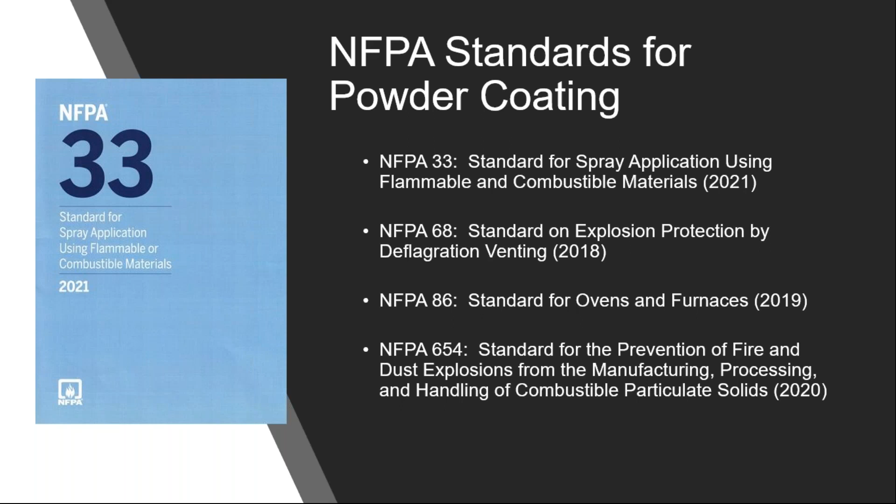If you look at NFPA 654, there's a section that says you need to do a dust hazard analysis of your facility. A lot of people think, gee, if I use powder coatings, I have to do this dust hazard analysis at my powder booth, and so on. But if you actually read 654, it says NFPA 33 is the standard that governs the processes around the powder booth. If the powder gets out beyond the coating operation, 654 would take place. So it's kind of a different way to look at it.

Here's the IFC. Again, it came from the International Code Council. They have the International Building Code and the International Fire Code, and that's why a lot of the AHJs reach out to the IFC, because it works hand in hand with a building code.

So who are our typical AHJs? Occupational Health and Safety, OSHA, certainly has governance over all of this. There's a standard, 29 CFR 1910.107, I think it is, which is the regulation for the powder industry. That was actually adopted from an older version—I think about a 1975 version of NFPA 33. And that's the current law we have to follow.

Other AHJs include local fire departments—that could be a fire chief, a fire inspector, a fire marshal—all of whom can come out and do inspections and either turn down a permit or cease operations. Oftentimes it's a local building inspector, and that's where the International Building Code and the International Fire Code work so well together. There's some confusion about NFPA 33, but those two work hand in hand, and the building inspector will come out and look at this.

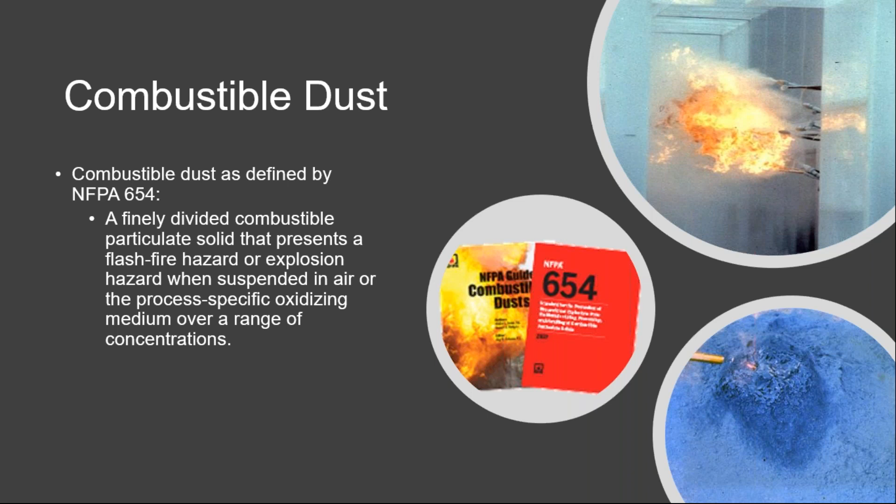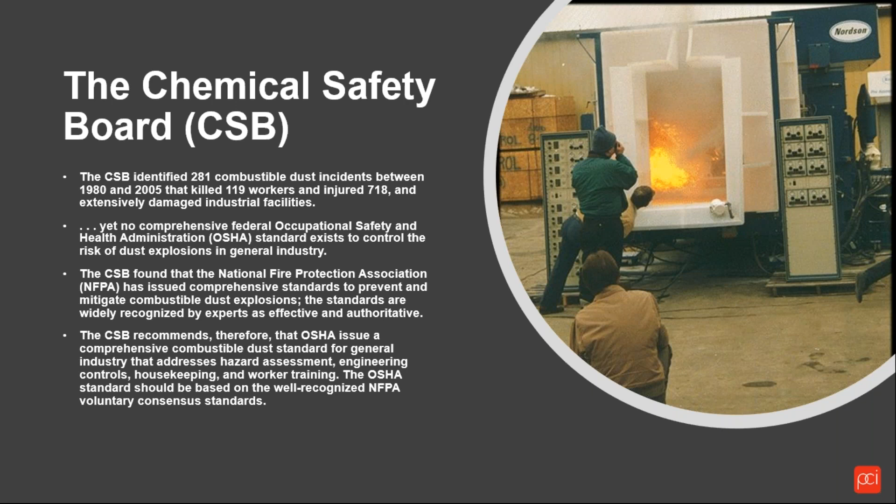Here's the information on the Chemical Safety Board, where they identified 281 combustible dust incidents and tried to push the government to say, hey, we need an overarching standard that can help here. So that's where NFPA 654 was adopted, to be able to do that.

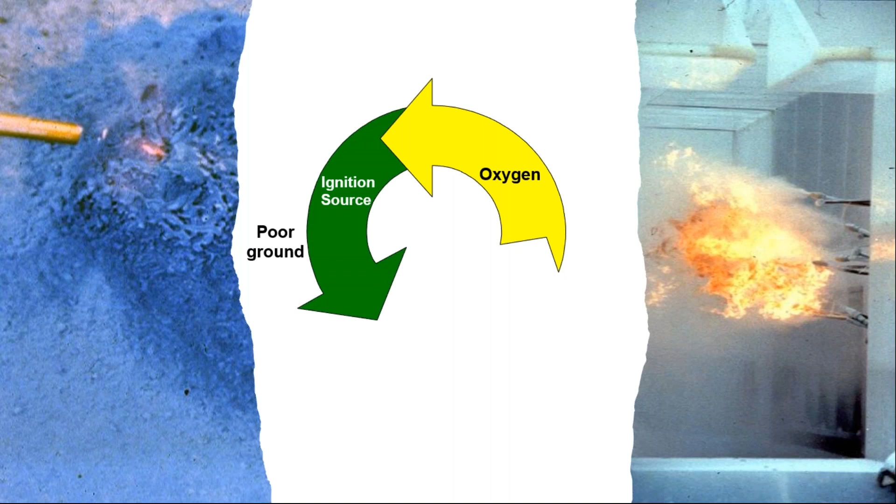So again, the simple fire triangle that we all know and learned long ago: we need oxygen, we need an ignition source, and we need fuel in order to have a fire. And if we can eliminate any one of those three, we don't have a fire.

While we use terms like minimum explosible concentration for powders, and AHJs read a data sheet that says the powder can, when mixed in air, become combustible, and we talk about dust enclosures and all that, we're worried about explosions. So they get very defensive right away, but they don't understand that the process really is a safe process overall.

If we look at the statistics in the industry, there are very, very few incidents annually with regard to powder systems. And most of the ones we have are due to operator error. An example would be our local waste department saying, in order to throw powder away, it needs to be fused in a block because we don't want loose powder in a landfill. So people take boxes of powder and put them in the vestibule of the oven so that as it heats up, it starts to cure in the box so they can throw it away, and then the box catches fire. That's where a lot of the issues come in.

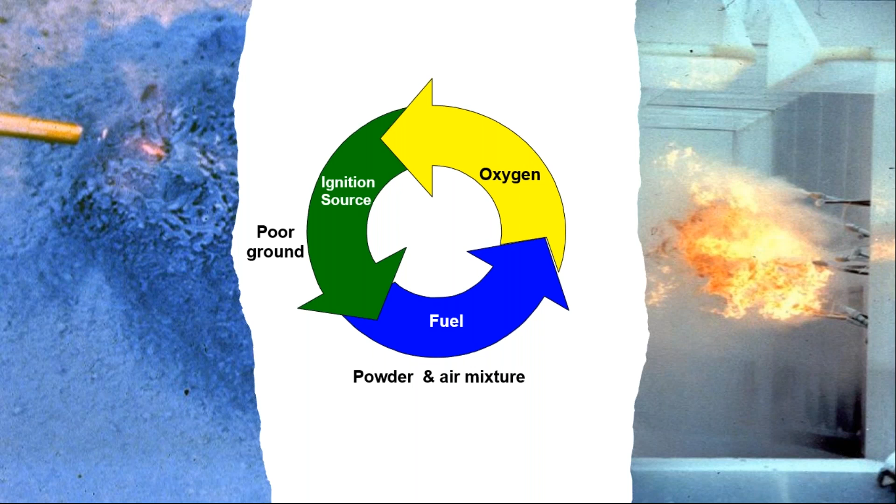So what we want to do is try to take these away. In our world, the biggest one we can take away - fuel's always there because we're always coating parts, and oxygen's always there because that's what we breathe. The ignition source is the big one. That's why we continually push grounding of parts, grounding of objects, grounding of operators in our system, because if we take away the ignition source, we don't have the fire we'd have otherwise.

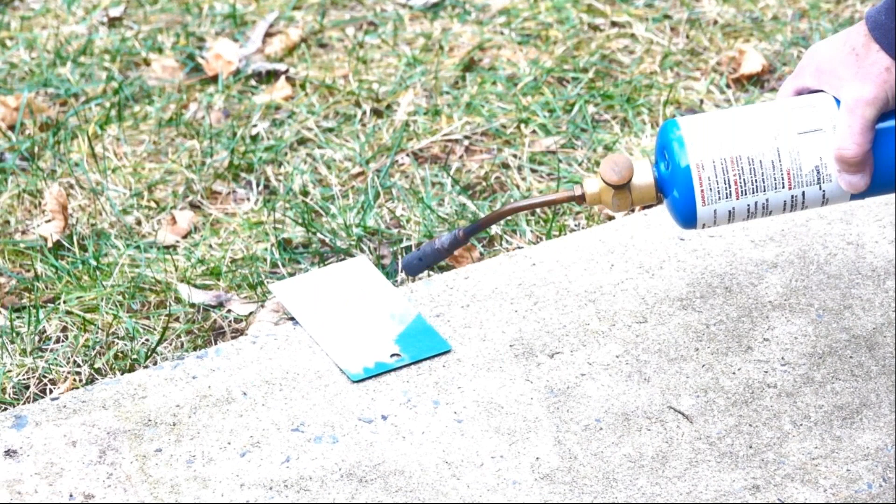So I did a real quick example of the combustibility or flammability of powder. I basically took some standard polyester powder, and using a torch, you can see the powder starts to melt and catch fire, but it quickly extinguishes. I go back and try to get it burning again, and it starts burning, but notice that it self-extinguishes. That's pretty much what happens with powder when it's not in the air, not in an airstream.

I did another example here where there's a cup that I'm holding. My son's holding the torch, and all I do is let the powder go through, and you can see how quickly that powder catches fire. I'll run this again so you can see how quickly it catches fire and comes up towards the cup. So the idea is, if we can eliminate the ignition source by making sure we have grounded hooks, grounded parts, and don't have an area where we can have that ignition source, we have a much safer operation.

NFPA 33, the IFC, and the OSHA regulation all say that we need to have - and this is a typo, I thought I had fixed it, I apologize - it's not more than 106 ohms, it's actually 10 to the 6th ohms, or 1 megohm of resistance on our parts.

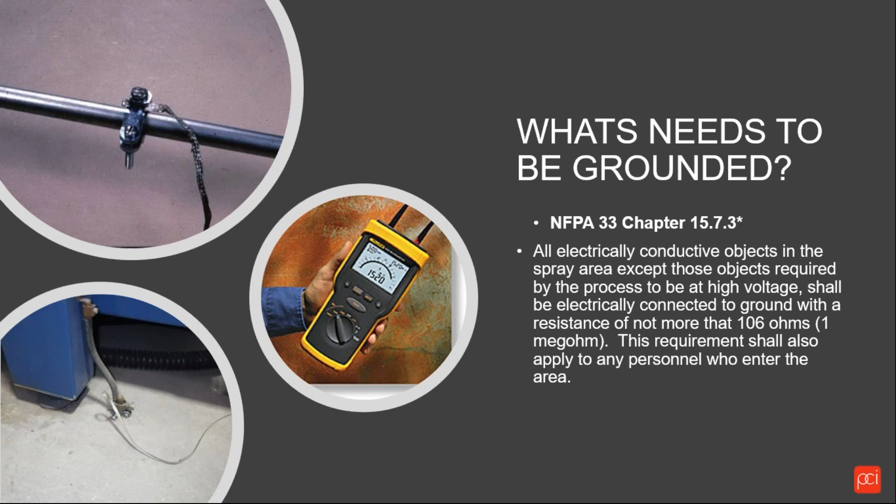And the reason we do that is that if we have grounded parts, it helps you in application of powder, right? The better the grounded part, the better the attraction, so our transfer efficiency is better. But we don't have arcing and sparking in the booth because we have poor ground. As long as we have good ground, we don't have arcing and sparking, and that takes away the ignition source.

I've had a lot of people ask me, how many times can I run my hooks around before I have an ungrounded part, or I exceed the 10 to the 6th ohm or the 1 mega ohm? And I say, I don't know. I can never answer that question because it all depends on your operation and how it's done.

Start with a grounded hook, one that's clean and bare, and hang it on your line. Where do we need to look at the ground? The most important place is in the booth. It's not really important at your washer, and not really important in the oven, but it's important where the powder is being sprayed, because that's where the fuel for the fire is.

So you hang your rack or hook, then take a meg ohm meter, because you have to use 500 volts or more of electricity to get a good circuit through that. Use your meg ohm meter, measure your resistance, coat your parts, run it around, and take that same hook and measure the resistivity again. Do that until you get to 1 meg ohm, and then you'll know exactly how many times that hook has to go around to do that.

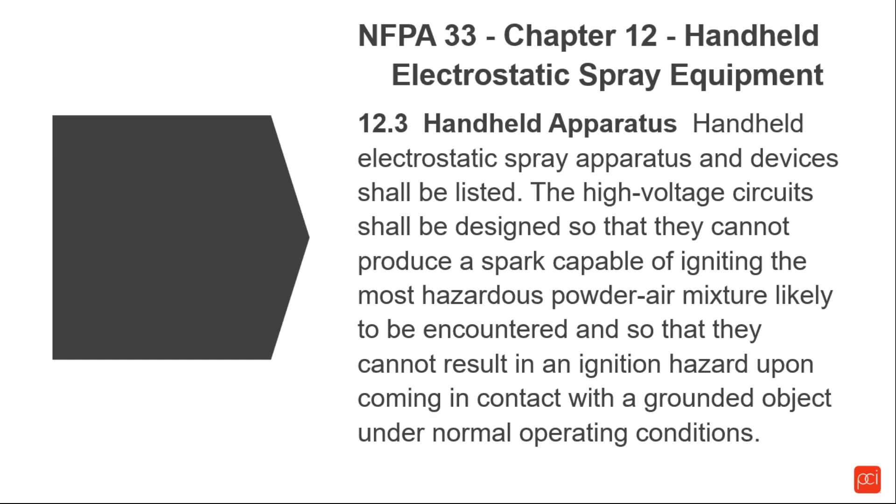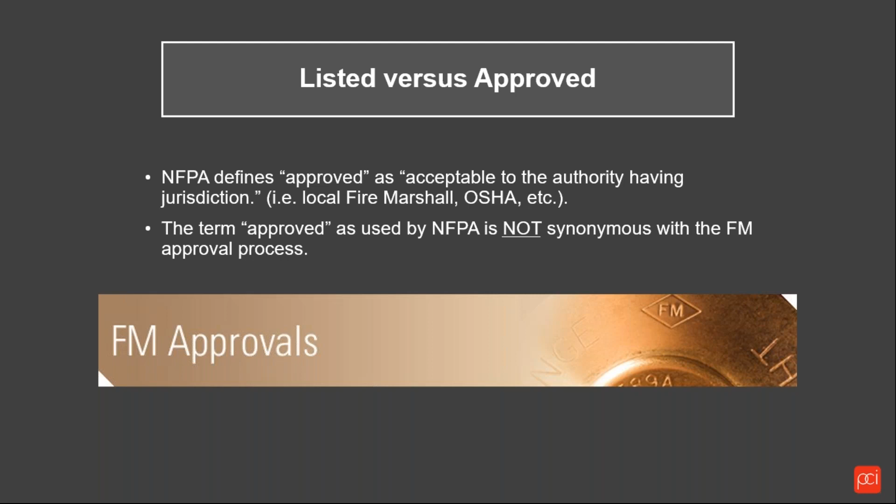Many people ask me what that concentration is, and I'll show you some information we can find there. Another question I get often is the difference between listed and approved. A listed device is one that has been tested through organizations like Factory Mutual, where they certify that that particular piece of equipment is safe to use, and that becomes certified. An approved or acceptable piece of equipment is one that the AHJ, the fire marshal, OSHA, or the building inspector has deemed okay to use, so now that is approved. The two aren't synonymous. They both can be used, but they're a little bit different in terminology.

If we have an automated system, meaning parts on a line with automatic guns that spray, and we don't necessarily have an operator holding or triggering the gun, NFPA requires that we have an automatic powder system with an optical flame detector, that when it sees a spark or flame, will automatically shut down the powder system within half a second.

There's a little bit of confusion between the liquid side and the powder side. On the powder side, we want to shut everything down, including all the ventilation and so forth. In a liquid system, we want to keep the ventilation on to remove any flammable vapors that are there. On the powder system, we want to shut everything down.

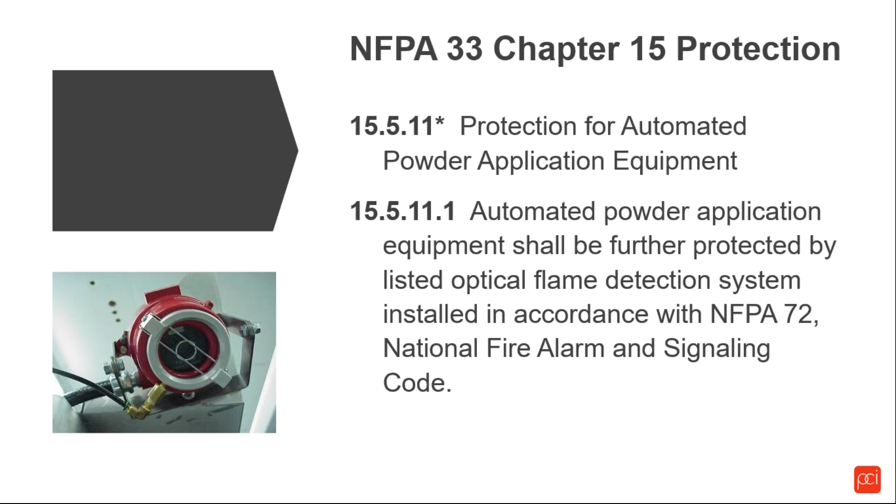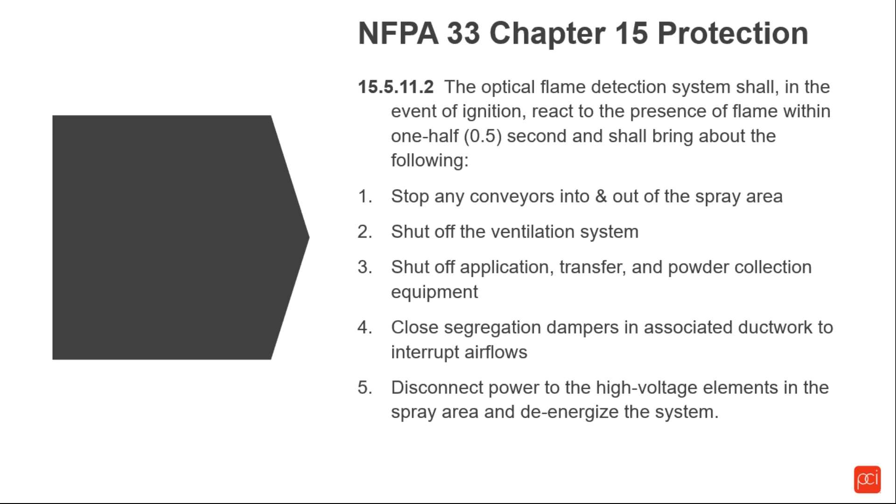We then reach out to NFPA 72, the National Fire Alarm and Signaling Code, which again talks about the optical flame system shutting it down in half a second, stopping the conveyor, stopping the ventilation system, turning off the powder, and turning off the collector. So absolutely nothing happens and nothing goes anywhere, everything pretty much stops. Here are just some pictures of the controls that are out there.

If we talk about a ventilation system, it can be whether you're spraying and the powder goes to a bag house, or you're spraying and it goes from the booth through ductwork to a bag house, or whether you have a cyclone system. These are closed systems versus a cartridge collector, which is an open system.

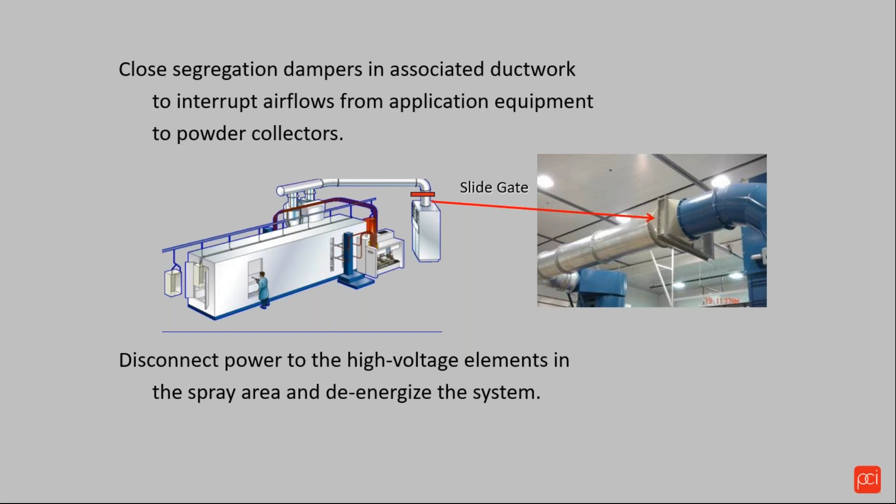We need to make sure that if there's an issue, if there's an explosion in the bag house for example, that flame does not come back into the building. So we have slide gates and dampers to help with that.

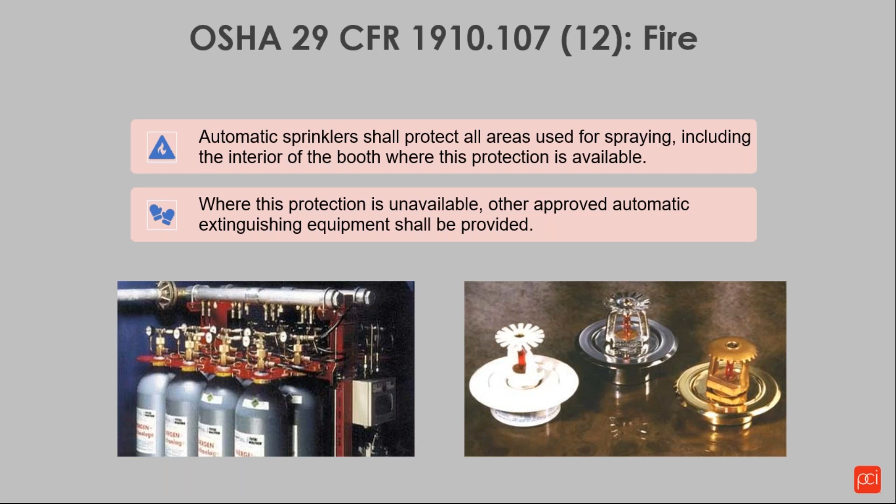Fire suppression: NFPA 33 says that you have to have fire suppression in all coating booths, whether it be manual or automatic. That fire suppression can be a number of different things. It can be water, it can be carbon dioxide, it can be automatic or dry chem - a number of different things, but you have to have it in there.

In the recent edition of NFPA 33, we did put in an exclusion. Booths smaller than 9 square feet, with a maximum of 3 feet in one dimension, do not have to have fire suppression in the booth. That was done because many OEMs, almost all of the powder producers, and a lot of smaller groups may coat 2 or 3 panels to make sure the color is right, the gloss is right. They can do testing on those panels, and it's not the same as an entire operation where powder's being sprayed all the time. It's a single manual spray gun.

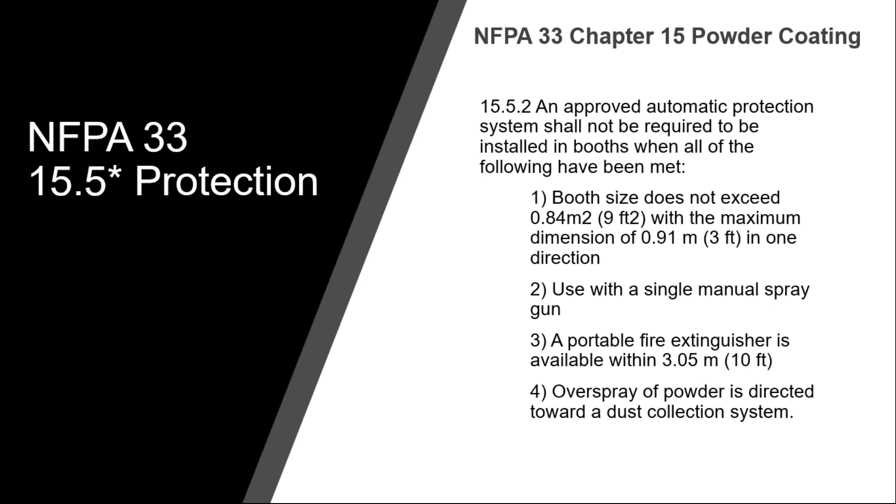A portable fire extinguisher has to be there, and overspray of the powder is directed towards a dust collection system, so there's really not a lot of residue or extra powder there. So we eliminated having to do that - that was a huge step in the process, and it took a long time to debate within our organization.

Air requirements: where non-deposited air suspended powder or powder overspray is conducted by ductwork, sufficient airflow needs to be provided to maintain less than 50% of the minimum explosible concentration. That's important for a couple of reasons - one, you want to make sure there's not enough powder in there, that it's too lean to catch fire.

If it wasn't too lean, then we would end up having to require sprinklers or some fire suppression in the ductwork. It may not seem like a lot, but when you design the ductwork, you have to design it to withstand the weight of water should there be a fire. So all of the supports, all of the ductwork, everything else has to change.

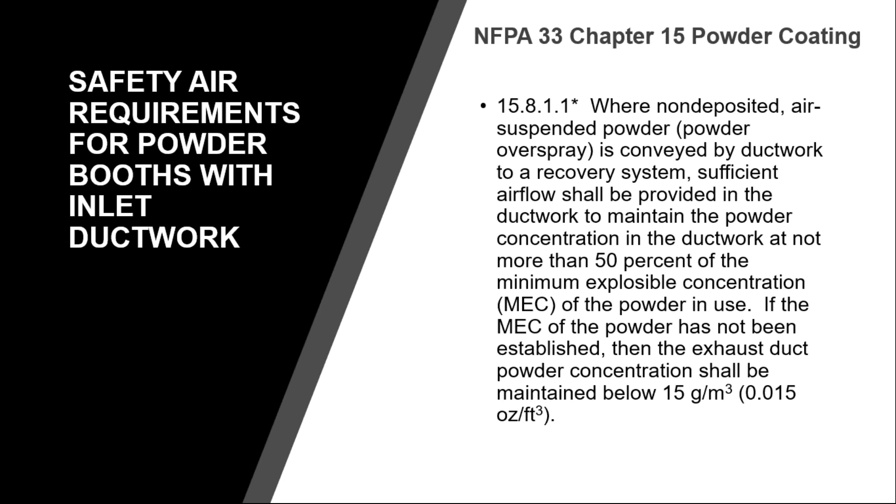And of course, if you don't know the MEC of the powder, it says you can use 15 grams per cubic meter, or 0.015 ounces per cubic foot, and that goes to the minimum explosible concentration.

Some time ago we were sitting at an NFPA meeting looking at the annex material and saying, wow, this data is really old, because we had some powders in there, chemistries we haven't used in years. A girl sitting there who worked at Factory Mutual said, 'I have all the test equipment in the world, but I don't have any powder.' And I said, 'I have all the powder and I don't have the test equipment.'

We also used bonded, blended, and extruded aluminum pigments in there, because everybody thought that if you have a metallic pigment, it's worse than the rest. But when you actually look at the data, no, it's not.

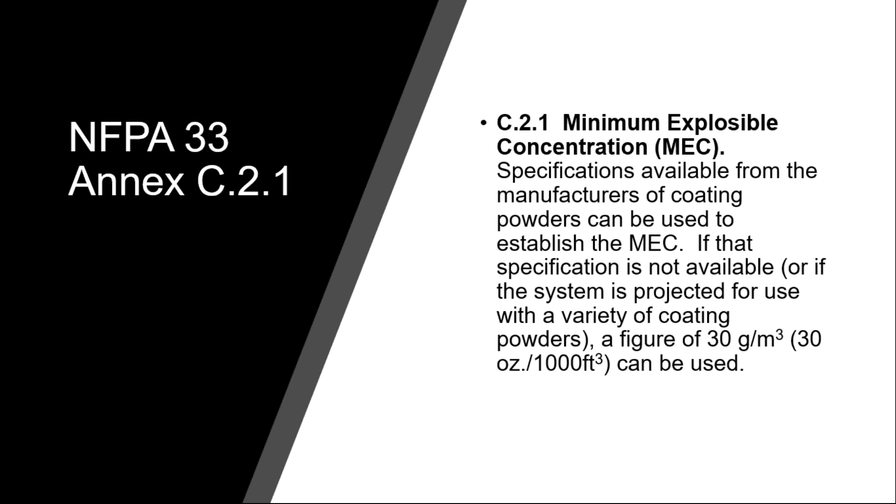We have some relative data, and that's why NFPA says if you don't know what you're using, or if you're going to use a multitude of different colors and keep switching back and forth, you can use a figure of 30 grams per cubic meter as your MEC. That covers you in all ways, and notice we don't even approach 30 grams per cubic meter in any of these. So that's pretty good. In an open system, this is what would happen.

If nobody's ever been to a facility that had a fire, congratulations, that's fantastic. I've been to two facilities where a fire occurred while I was there. It's a rather unique experience when the fire happens. In one case, it was a handgun, and it was rather interesting - the operator stopped spraying, shook the handgun off, and went right back to spraying again. Within 5 minutes, it caught fire again. I said, stop, what are you doing? We had to fix that, and again, it was a grounding issue, simple as that. The other was an instance where it was a continuous line.

They used a carbon dioxide system, so it didn't put dry chem in the powder and so on. As soon as the system went off, everybody kind of stood there. The operators knew what happened because this had happened before, and the alarms are going off, and everybody's trying to figure out what's going on. But it's rather interesting.

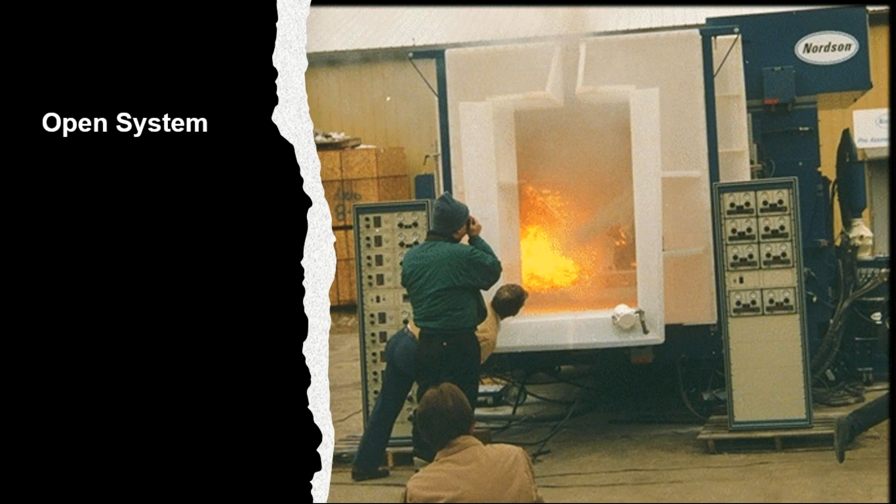I've been involved in a couple of investigations of fires, and in almost all cases, grounding was the biggest issue. If we have the open cartridge, all we have is a fire. If we end up getting into a bag house or an enclosed system, unfortunately we can end up with an explosion, because the fire has to vent. If it's closed, it will vent one way or another, and that's what we're trying to avoid.

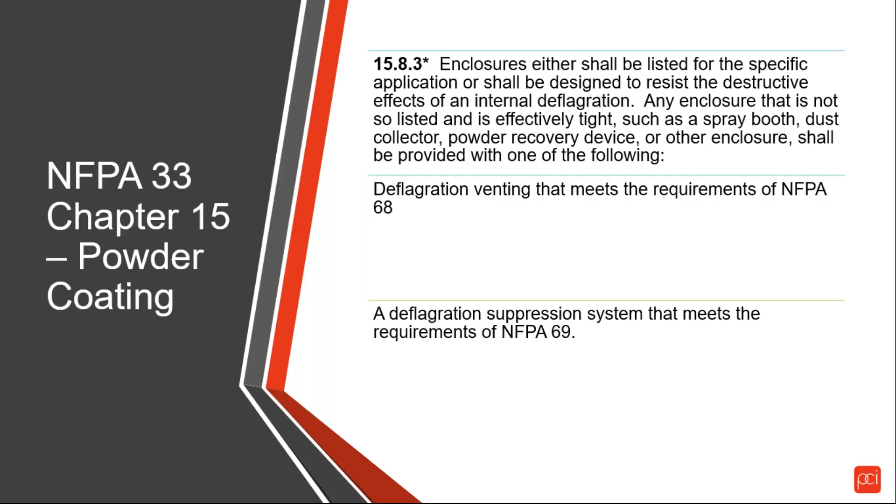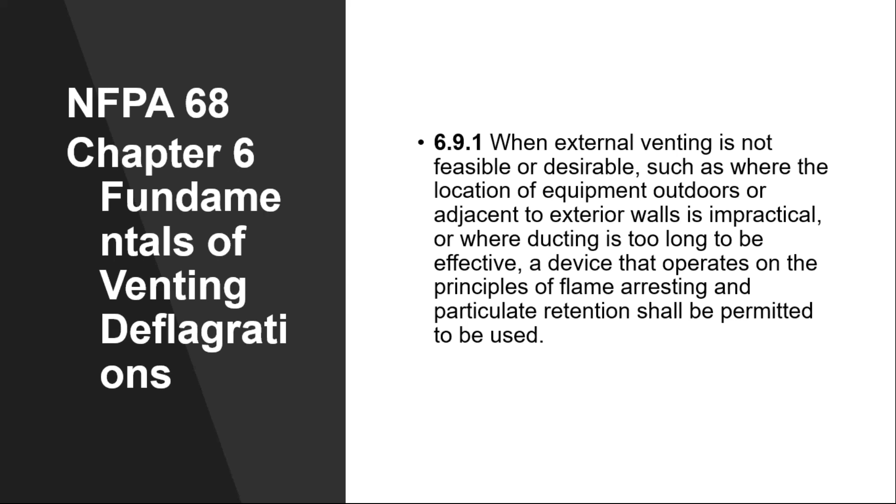When external venting is not feasible or desirable, such as where equipment is located outdoors and so on, we need to do this venting, which brings me to another point about AHJs. We had an AHJ in the Carolinas - I don't remember which one - where they wanted to buy a typical freestanding cartridge collection booth, but their local regulation said it had to be vented to the outdoors. Well, there's no way to vent that booth to the outdoors because it's all combined. So even AHJs have difficulty sometimes understanding the differences.

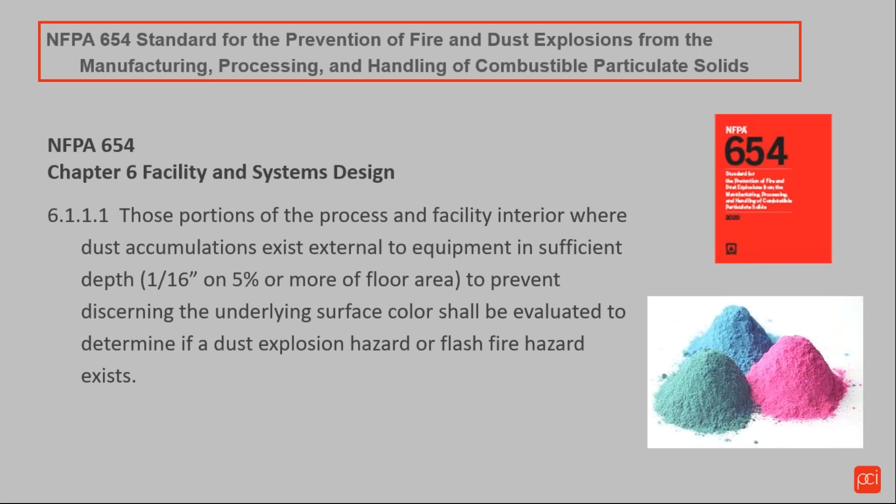NFPA 654 - as long as we do housekeeping, as long as when we're spraying powder stays in the booth, and all of my friends in the industry that make equipment are very good at designing systems to keep powder in the booth. The problem is we tend to add more guns, our filter media blocks up, and occasionally powder starts to drift away. Once it starts to get outside the confines of the coating system, NFPA 654 jumps in and says you can't have more than a 16th of an inch, or the thickness of a dime, of powder anywhere - floor, rafters, or otherwise - because when we get that explosion in the collector, it'll rattle the building.

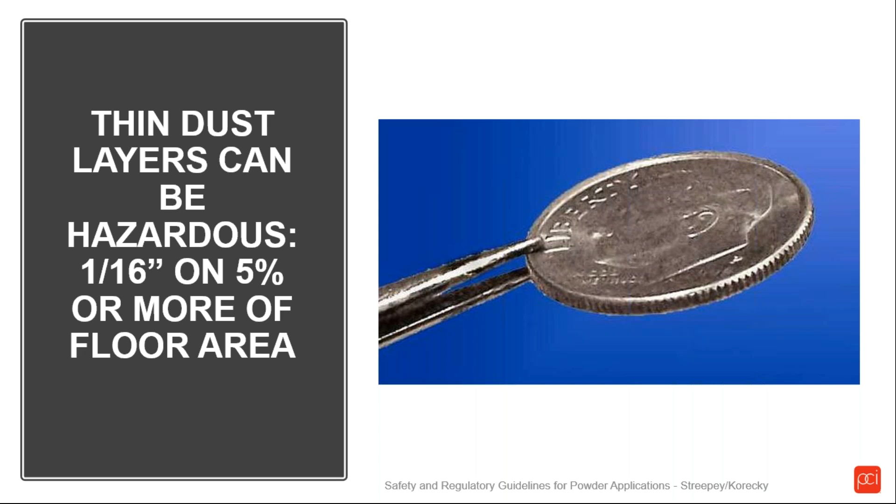As soon as that rattles the building, all the powder that's on the rafters and everywhere else starts to come down, and you have a secondary explosion. While that first explosion is a concern for the outside, typically not many people are there, but now when the secondary explosion comes inside where the operators are, that's a concern. That's why they want you to do a dust hazard analysis, to make sure you don't have dust greater than the thickness of a dime anywhere in the system.

So all in all, the idea for understanding NFPA or IFC is, if you're going to do a new system: one, communicate to your equipment people, communicate to your powder supplier, communicate to your AHJ. If the AHJ doesn't understand, reach out to your equipment people, your powder people, your folks here at PCI, and we will help you talk to these folks and understand the differences or the standards, so that you don't get to the point where your system's all set and ready to go and the building inspector won't give you a permit, or the fire department won't let you start up, or your insurance company says we won't insure you. We want to make sure all of that is done way up front so we don't have those issues. We always want to be there to support everybody in the industry.